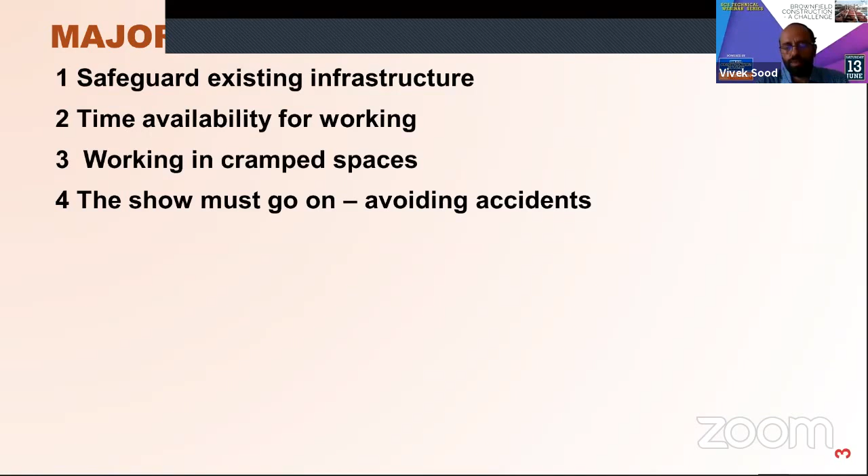Then you have to work in cramped spaces, as we just saw in the metaphoric example, so the space is limited and you have to work within that space. And accidents, if they happen in a greenfield project, they are affecting only the project. But if the accidents happen on a brownfield project, then the existing facility also will not be able to function, so avoiding accidents is even more critical. Accidents are always bad, but to have an accident in a brownfield site is even worse.

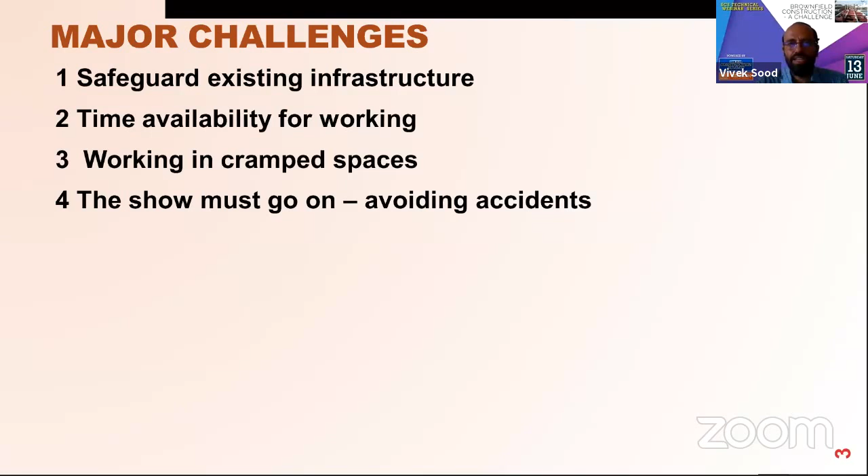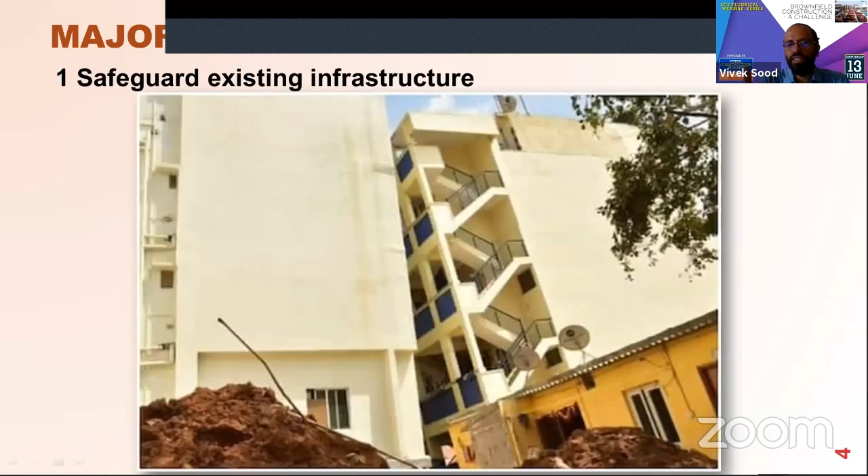I'll take these challenges one by one. So this is the building, and some work was going on next to it, and because of this excavation, the whole building has tilted. You might have seen this in the news, I think it was in Bangalore or somewhere. So this is a challenge: how to safeguard when we plan the work, how we ensure that the existing infrastructure, whatever building structures exist, are not affected.

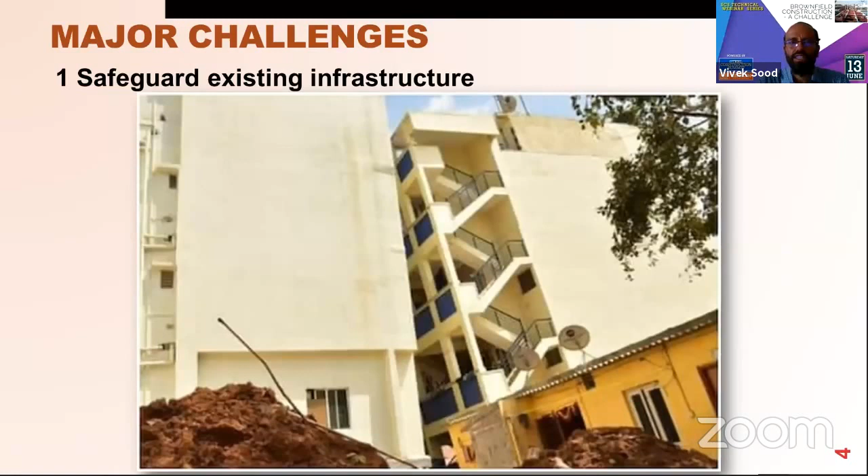When we are talking about the tracks, when it's a brownfield construction and the railway is nearby, you have to leave space for trains to move. Trains are a totally different kind of vehicle compared to road vehicles. We are more tuned to road vehicles, and as we have the habit of crossing the road, we judge how far the vehicle is and when it will stop. That's part of our subconscious, but when we work near railway tracks, how trains behave is totally different. We'll cover this in the next slide.

Then you have to keep away from the electric equipment. Whatever electric wires are there, those are another important item when working near tracks. And the permanent way, this has to be safeguarded. I'll cover these in detail in the subsequent slides.

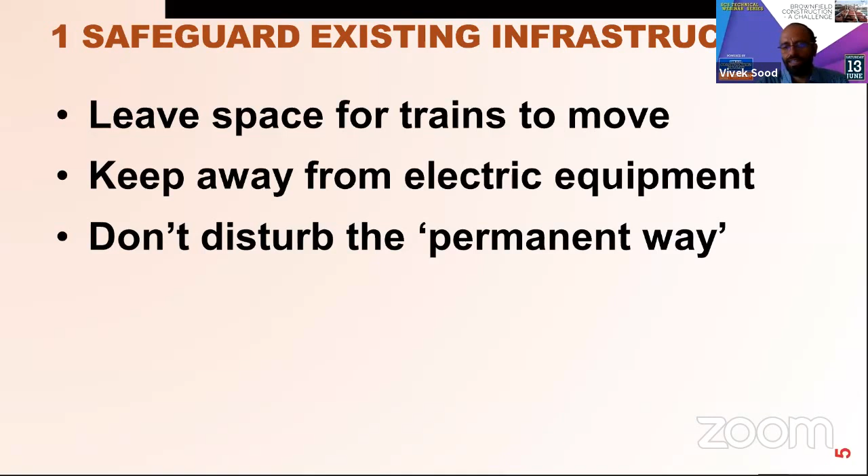This is a very challenging thing, and why it's challenging is, look at the scale. If you've got this car and that car, the distance between them, even moving at full speed, maybe 30-40 meters is good enough. Whereas if you have a train and an obstruction somewhere, the distance required is something like 800 meters, 1000 meters, even more. If it's a loaded goods train, it will take even more time.

It is not possible for the driver to see an obstruction and immediately stop. It takes a very long distance first for the driver to notice that something is wrong, and if he applies even the emergency brake, it's still 500-600 meters bare minimum for the lightest train; for heavier trains it will be even more. So if stopping the train is not possible, the only feasible option is to keep that area free at all times.

If we have to work in an area where trains are to move, then we have to take a shutdown or a block so that the train does not come while we are working in that area.

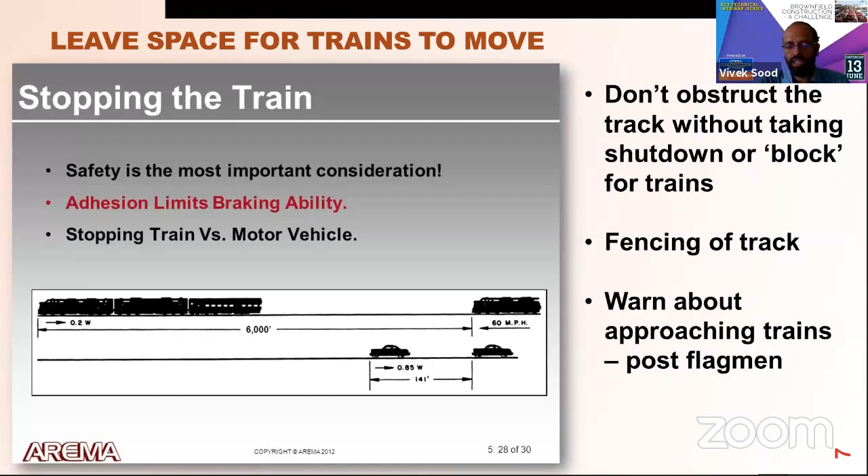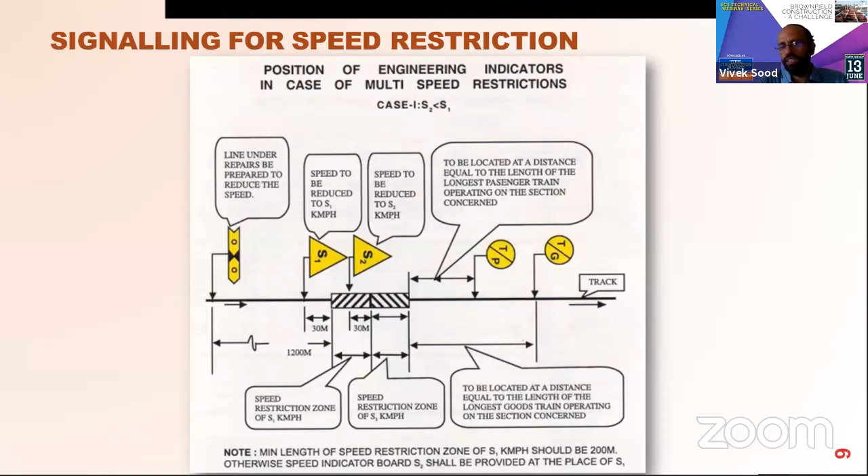It is given in writing to the driver that this kind of signal is going to come, and they may have to slow down or stop the train. So these safeguards are also sometimes taken if you are working and there is a requirement to slow the trains.

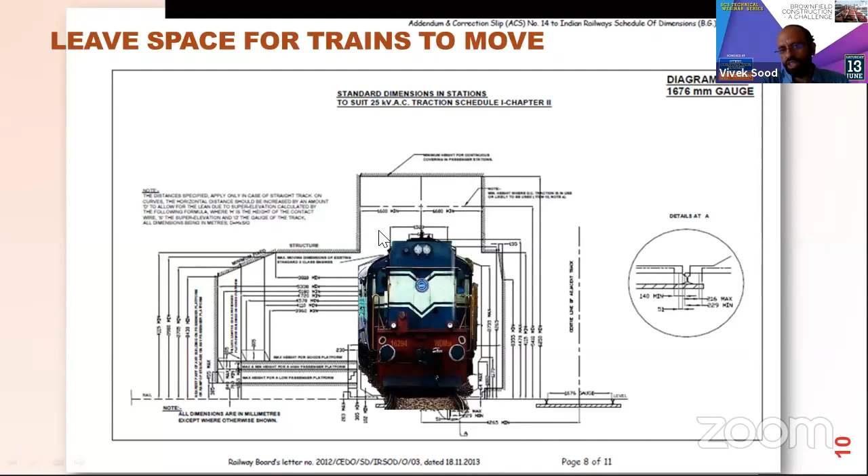This is how a typical train moves on the track. So the space that is earmarked for the trains is something like this. This is the engine, and you see the dimensions of the engine. Beyond the dimensions of the engine, this area is there, which is the blue area meant for the trains. This is called the maximum moving dimension, and then with some more margin, anything that you are doing should be beyond this hashed line.

All this hashed line is to leave the space for other appurtenances, and there will be overhead electric equipment here. This is a platform, so if the platform is there, then you need to leave more space. If there is no platform, this is the space.

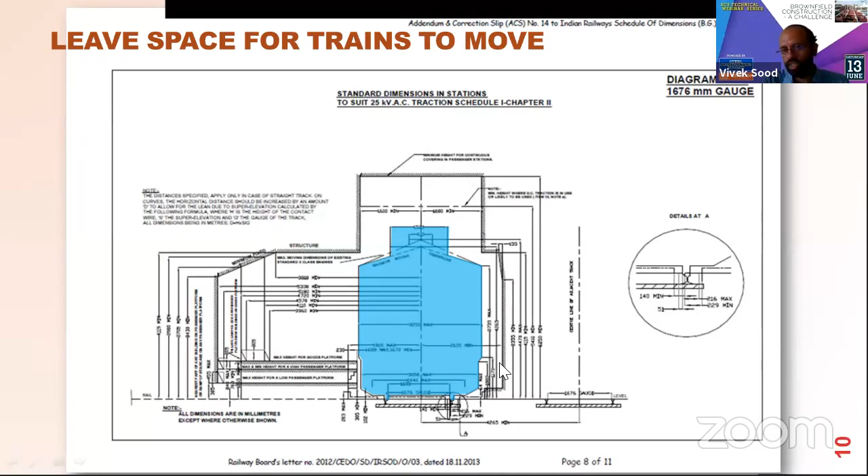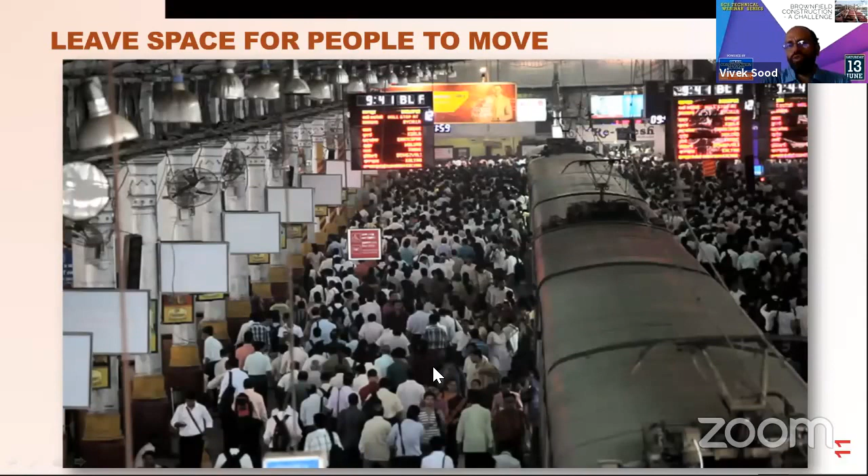So for people who are getting down from the train, you cannot have these columns right next to the train. You can see this area is meant for the people on the platforms. On the other side, nothing is required.

This sort of diagram is given in a book called Indian Railway Schedule of Dimensions, and similar schedules of dimensions are issued for metros, for DFC, and high speeds. All the different kinds of railway systems will have their own schedules of dimensions. These schedules of dimensions are to be respected at all times, or you have to take a safeguard to save the trains from accidents, and there should be no obstruction to the train.

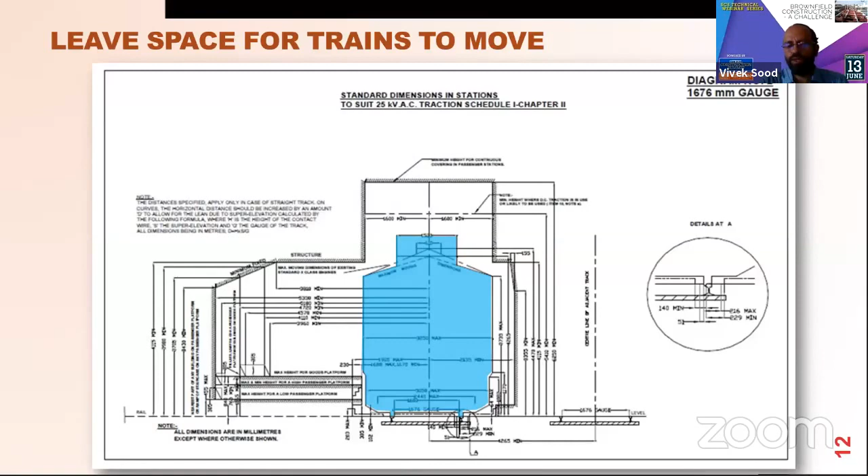Overhead electric equipment is a very dangerous thing if you go too near to a live conductor. So we have to be very careful. You can see that these kinds of works are sometimes required.

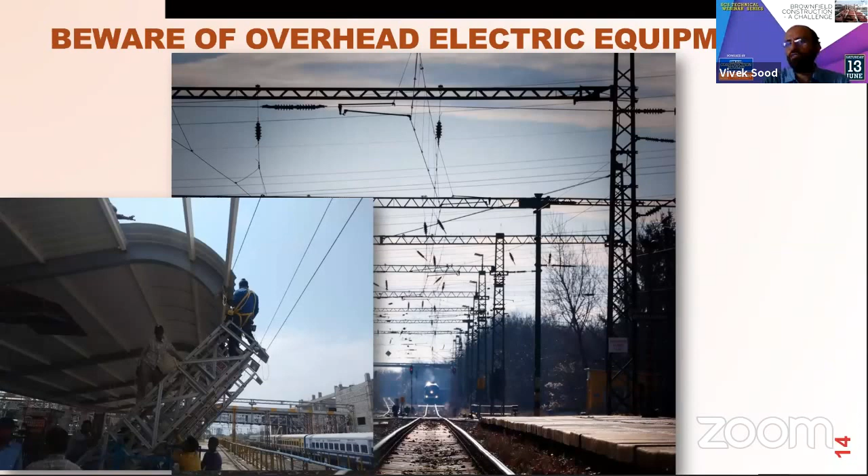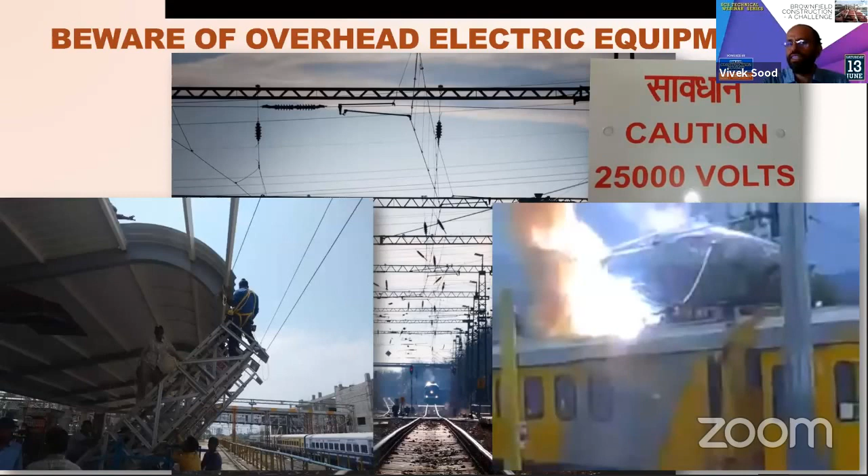These are the overhead wires, and these fellows are fixing the cover on platforms, sheeting. So this work has to be done carefully, because there is 25,000 volts of electric current, and the differential with the earth is too high, which can lead to fires, and the consequences are disastrous for the people and for the equipment which comes in contact with the 25,000 volts.

And from any charged conductor, the minimum safe distance is 2 meters. So you have to keep 2 meters away from any equipment, any conductor, so that there is no accident because of the electric current.

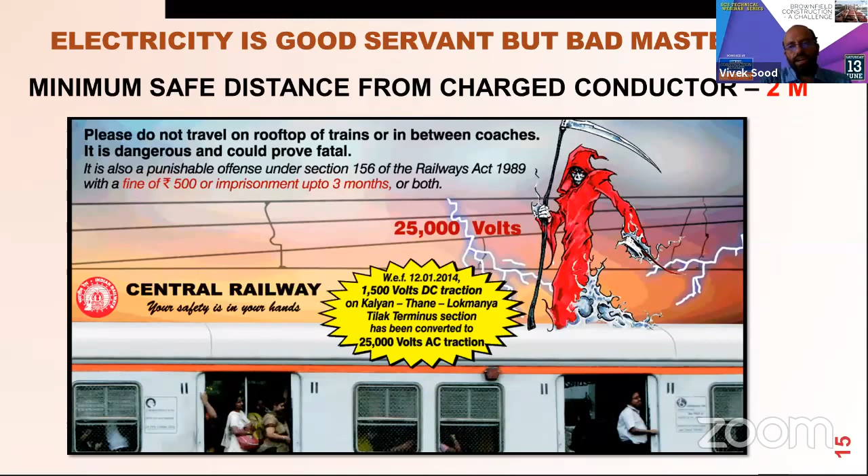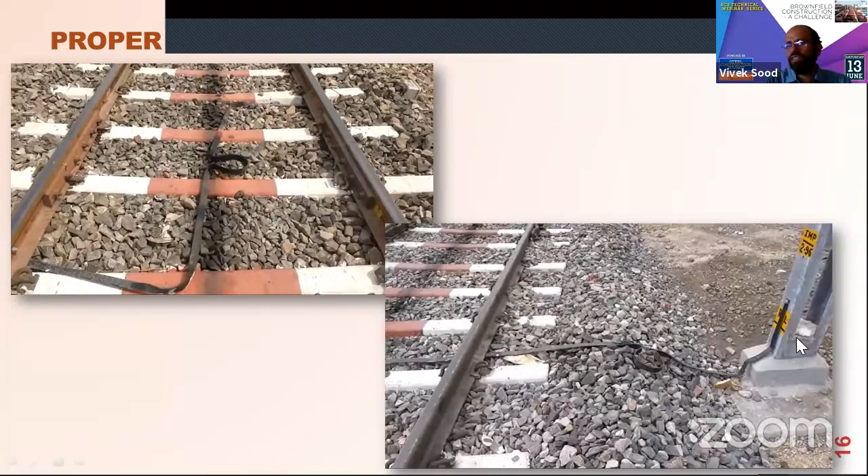And all our arrangements are properly earthed. You can see this is one kind of bond, and this is another kind of bond. So a complete track is earthed to avoid the situation of a short circuit between the OHE and the ground. This has to be taken care of even when you are doing work next to the track. So let us say this is a rail, and another rail, because once the length of the conductor becomes more, the induction also is more.

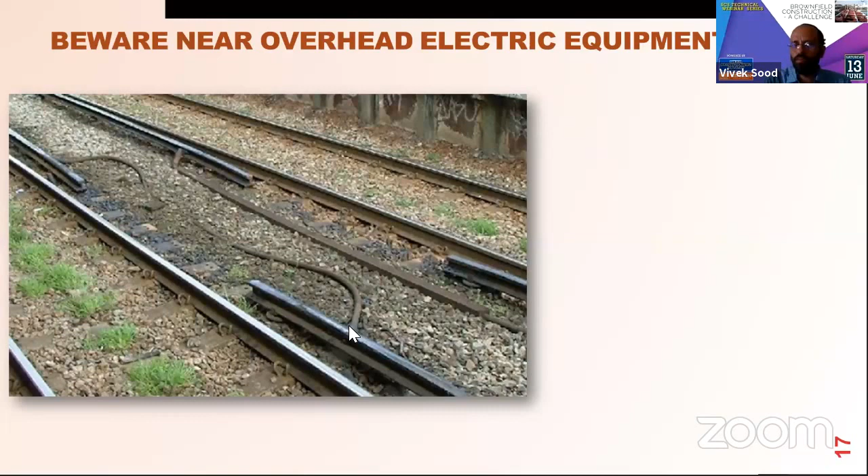So this continuity has been provided, and along with this continuity, some sort of earthing has to be provided, so that the induced current also doesn't go on the higher side, which might lead to minor shocks if not a major accident. But minor shocks can occur because of this, which can lead to its own accidents.

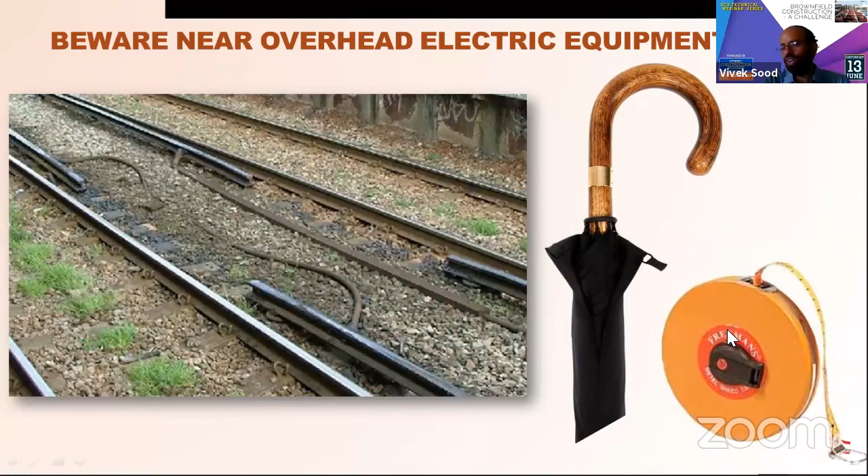Then there are small things. These are the wooden handled umbrellas that we used to use so that the induction doesn't come into our hand when we are working near the tracks. The tape that we are using should be insulated so that by chance, if the rail is not properly earthed, then the charge should not come into our hands.

So small precautions which are there near overhead equipment - any conductor is to be taken as live unless proven otherwise. It has to be assured that the conductor is dead or properly earthed before we get anywhere near it or start working on it. So these are elementary precautions and some special precautions for the railway area that we have to take.

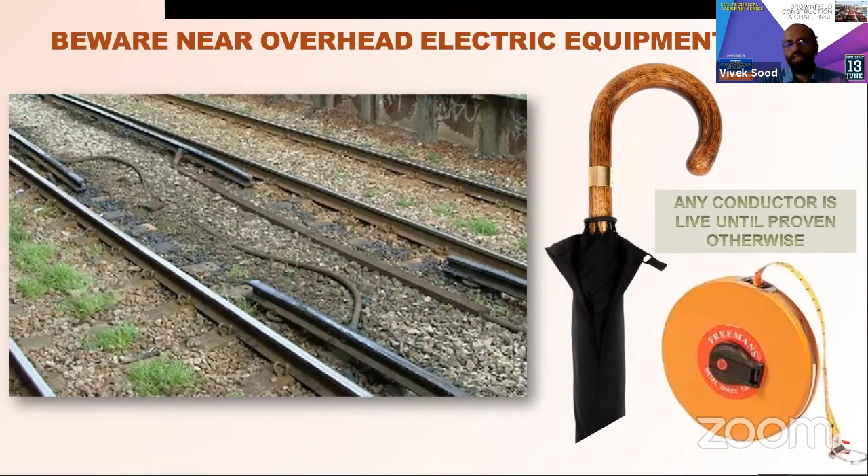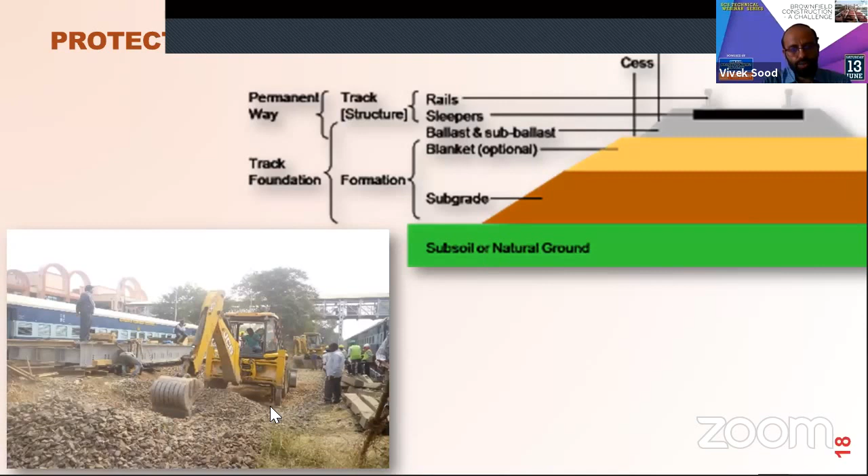Now the track - this is called the permanent way. So we have got the rails here, sleepers, ballast, then blanketing, and then subgrade, and then the natural ground. When we are doing any work, let's say excavation is going on, we have to be very careful because the trains put their load on this whole arrangement. And if we just disturb this portion, then we will have some sort of slips, which might create unsafe conditions for the trains, which is not a good idea.

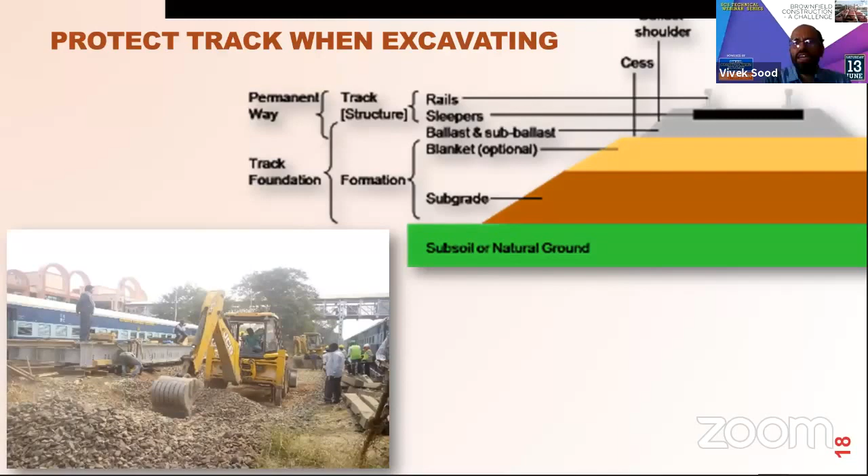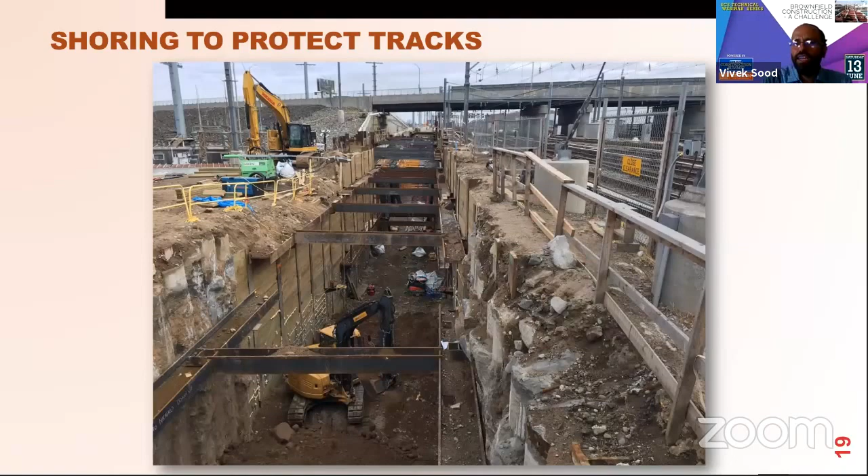We need to be very careful with this and provide shoring or protective equipment to save the slopes so that the trains can move safely. And be very careful when water comes in. Everybody understands that when water comes in, the bearing capacity of soil goes down drastically. So in the monsoon, or wherever we anticipate underground water or any surface water to come in, we have to be very careful in those circumstances and leave extra margins of safety or extra precautions.

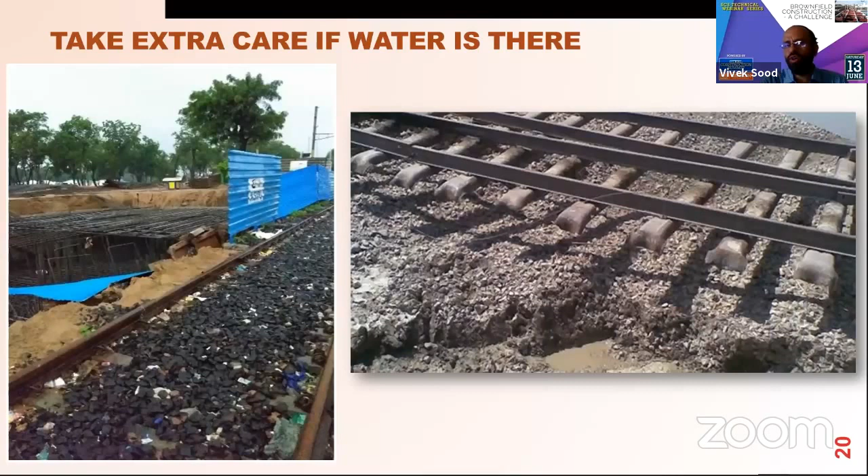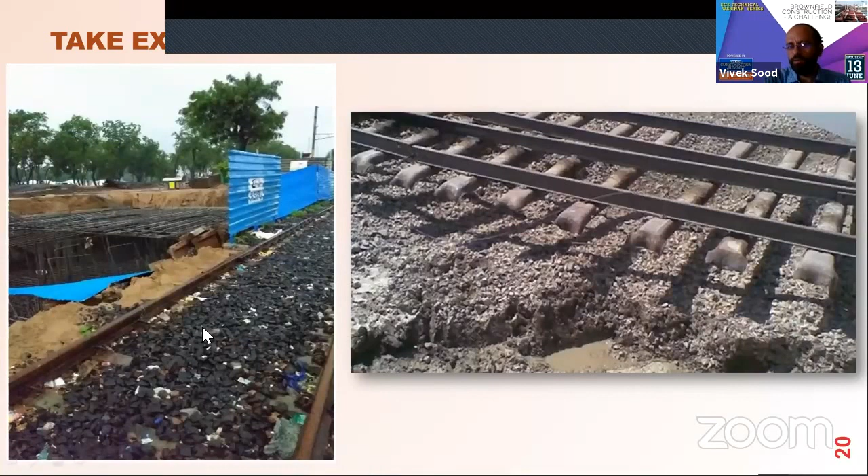So this is actually my own site - we had minor problems because of unscheduled rains. So these things happen, and we have to take extra precautions when water is there.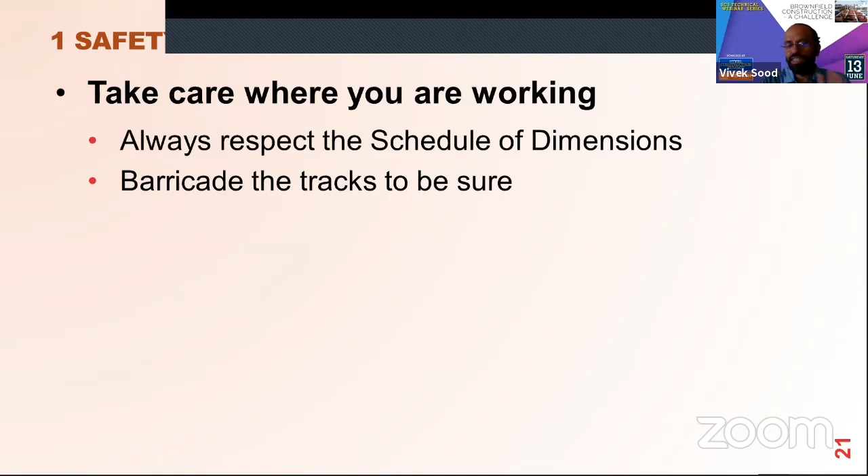So to summarize once again, because of safety, you cannot be too sure. Just to remind, whenever we are working, respect the schedule of dimension, respect the space where the trains are moving, and barricade the tracks to be extra sure. Take suitable traffic shutdowns if required. Earthing and insulation you have to take care of.

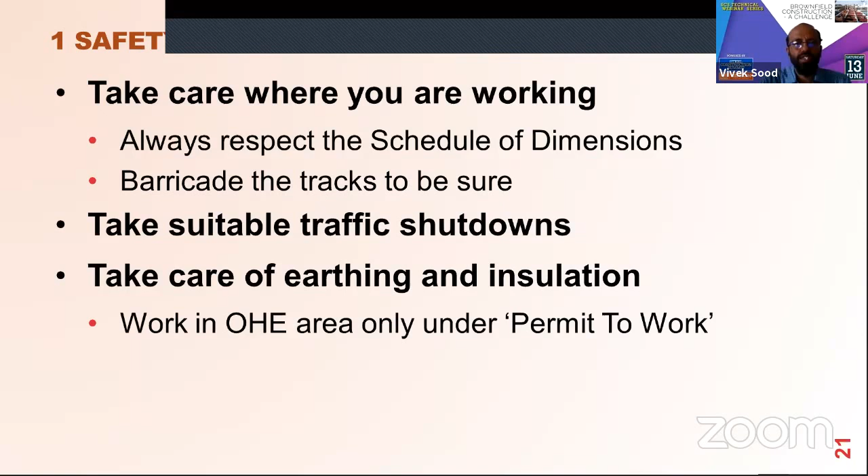If you want to work in the overhead electric area, you take what is called a permit to work. So take proper approvals, earth the electric equipment before you start the work. And when you excavate, take care that the track is properly supported. When water comes, you have to be extra cautious. So this is just a summary of that.

The second major challenge when we work in brownfield construction in railways is that time is always a constraint, because the tracks are busy, and in this busy time, if you want to do anything which affects train movement, then you have to stop the trains. If you stop the trains, then the time naturally will be limited, because that much time is not free. Free time is not available.

So typically the working time which will be allowed is up to 3 hours - that's easy. You can go 6 hours, 10 hours, but then it becomes more and more difficult to arrange. And if you want multiple tracks - let's say there are 2 tracks and you want to shut down both, now no train can move - that will be even more difficult. If you have got 4 tracks and you want to shut down all 4, it's even more difficult. So the working time and the space for working is limited, and we have to work within these limitations.

So what that does is work is to be planned in such a manner that it is manageable in that 2 or 3 or 5 hours, whatever we have got. And we don't have the luxury of using any scheme that we want. And this is most important - immediately after those 3 hours or 5 hours or 10 hours, whatever we have got, the track has to be fit and the traffic should move safely at the end of that.

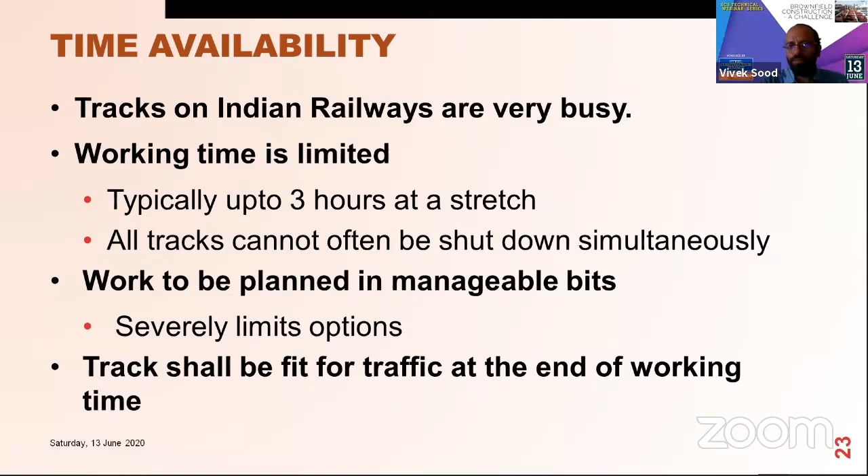Now, this is the most important item, because you can do the work and leave the site and come again next day. But that luxury is not available, because you have to leave the whole site well prepared for the trains to come immediately after the block is over. So this is the major challenge which dictates most of the schemes that we make.

So we need innovation, and what we need is a simple and easy scheme, so that mistakes are not there, so that you don't overrun the time, you don't have the other complications which happen if you don't make simple and easy schemes. Use more and more pre-assembled units, so that the complete assembly goes and gets erected in one go, and there is no need to do extended blocks.

And you have to take extra precautions. There should be a plan B, there should be a plan C, in addition to a very robust plan A. So this is again a very important care to be taken. People have to be skilled, people have to be experienced, working near the trains, working with the time limitations.

That discipline has to be there in the people. And this cool working is linked to the first item. It has to be a simple and easy scheme so that it does not have too much complications. The people who are working have to be cool, because the less time that you have got will build the pressure. Because in these 3 hours, maybe the first 2 hours you can be a bit okay, thinking there is still time. But the last hour will be that now you have to wrap up, and there are maybe 100 activities going on simultaneously.

So in this pressure, when the person who is looking after the scheme starts creating this hurry-up pressure, this can create mistakes which can lead to either an accident, or it can create such a situation that now you're not able to close the site and hand over for the train operation.

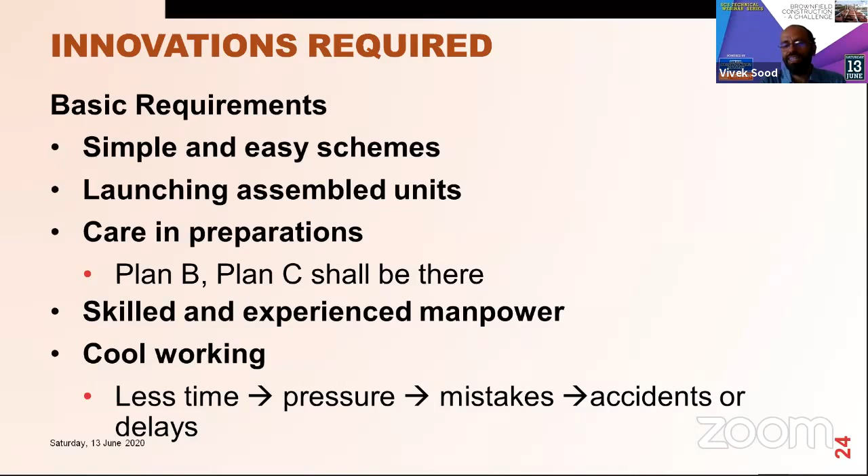As few things as possible — if there are few things, then the person can look at that and be confident that okay, I'm doing fine, and there is no need to panic. So this is the basic requirement when we are working near the railway track in brownfield construction. So this is what is required.

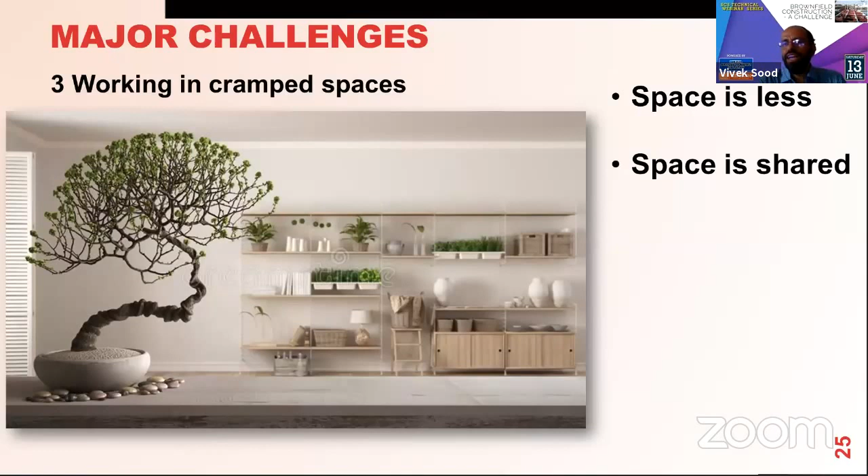And the passing trains are to be kept in mind, even if it is next to your site, even if you are not really above the track, below the track, or just exactly by the side of the track. Even if you are 5 meters away or 10 meters away, still you have to take care that nothing should come onto the track. So the space crunch is also creating its own complications.

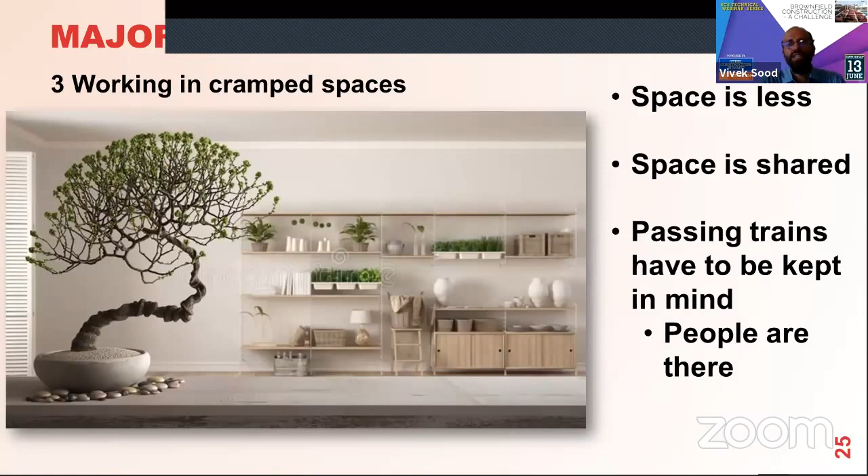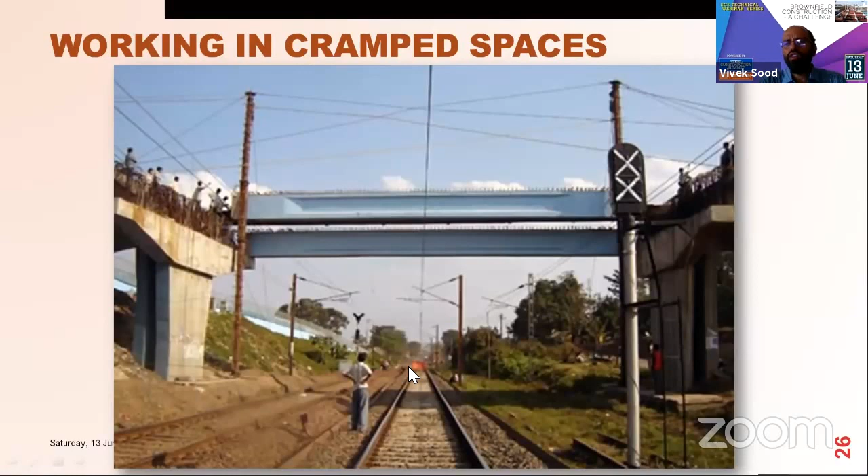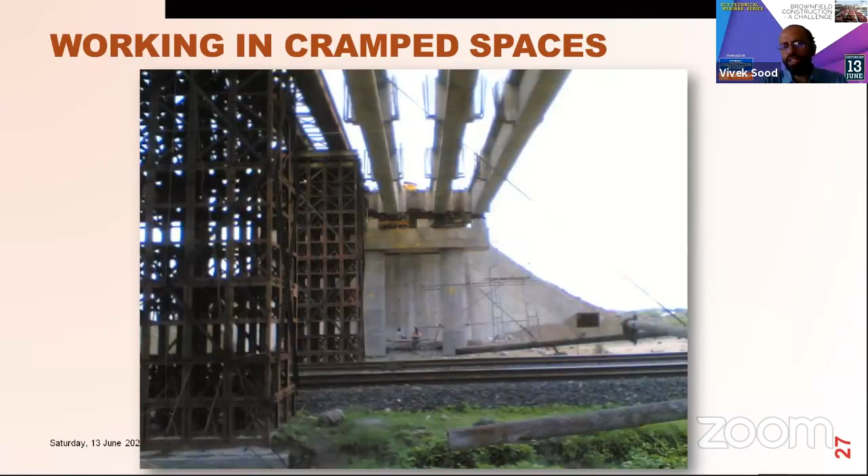So a lot of limitations are posed by the site. So you have to work in this space, and you can see that all this arrangement creates so many complications when you are working in this kind of spaces. So this creates its own challenges, which we have to keep in mind when we design the scheme.

So one important item is that whatever loads you are putting on the ground outside the track can also affect the tracks. So proper foundation and proper calculations have to be done, so that the load from the temporary arrangement, from our girders, from our arrangement that we have put outside the track does not affect the track.

Another very important thing is these utilities: electric lines, sewer lines, signal lines, telecom. In fact, signals and telecom cables are the most important. Electric and sewer lines are found everywhere, but if you cut the signal line, then the trains cannot run. So the whole complete railway system runs on these signals and the telecommunication, the people talking to each other. The whole system works on this.

If you cut the utility, then maybe for the next 10 hours the trains are not able to move properly. So there are those kind of repercussions, very severe repercussions, especially with the signaling cables and also the telecom cables. So these are very important. And of course, electric cables are important for the safety of people who are working. So even if you are away from the track, you still have to take a lot of care.

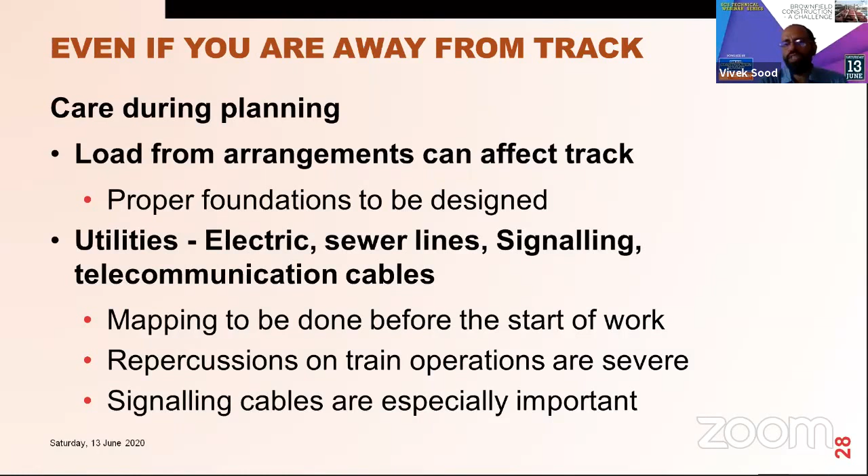And this is the actual site. This is Habibganj, in fact. Before starting the work, we excavated, and the developer, by mistake, cut one cable. Then by mistake he cut another cable. That second one was really unfortunate, because it was the 40 mm bore being made for the geotech investigation, and by chance it punctured one of the signaling cables.

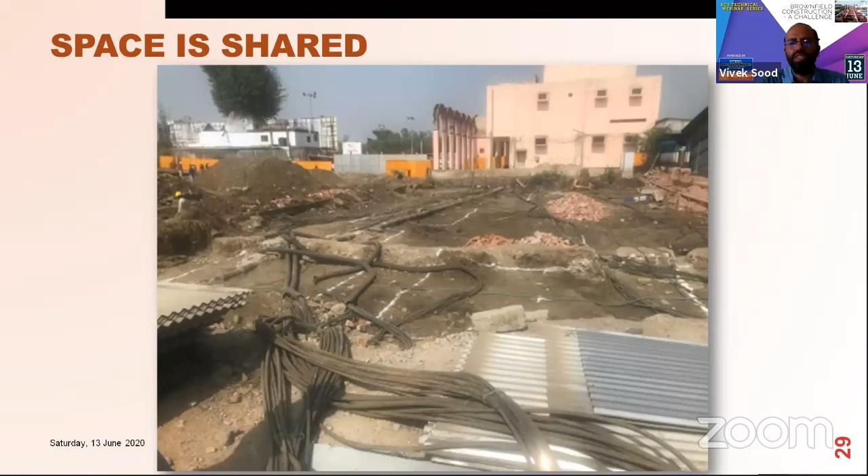Thereafter it was decided that we have to first see how many cables are there. The entire space was dug up for 1 meter, and we found something like 200 to 250 cables at different locations. Once that was exposed, all the cables were shifted, and thereafter, in the last 2 years, there has been no cable cut, no need for anything affecting the railway operations.

Another important element: you may in theory design something, but when the trains are moving, vibrations are coming from the trains. So if the elements are not secured properly, these can be dislodged. You may have calculated that your arrangement is all away from the track, but it can move towards the track due to the vibrations.

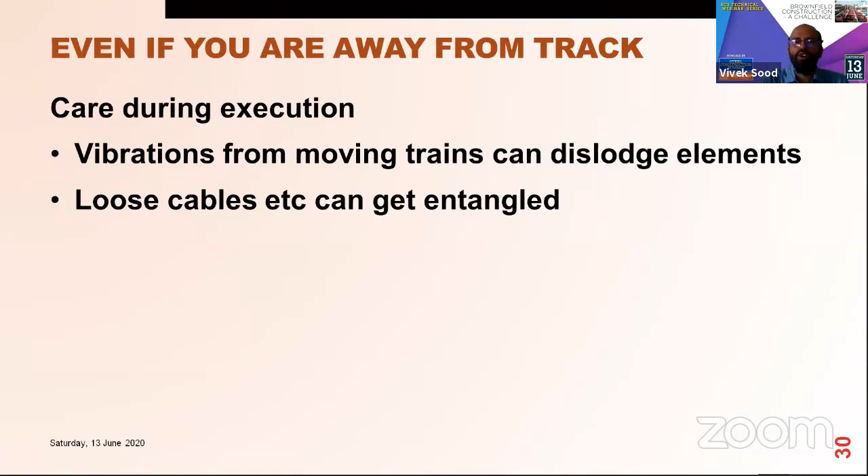Loose cables can get entangled. If something is dangling and the train comes and gets entangled, the whole arrangement can fall onto the track. Debris can fall on the trains. Anybody working, and some bar, crowbar, or reinforcement bar can actually fall onto the trains. So you have to provide safety nets and precautions so these things don't happen.

And of course, lookout that we have already seen. So for the safety of the personnel and the job, always keep a lookout on the trains. So even if the work is stopped, let us say at night, you should still have a person at night looking to see if the passing trains have affected the arrangement that we have provided.

So even if you are away from the track, you still have to take care that it's not the end of the world just because you're beyond 5 meters or 7 meters. It doesn't mean you are safe. Maybe at 20 meters you are totally safe, and within 5 meters you are actually on the track. So between 5 and 20 meters, you still have to take care of these kinds of things.

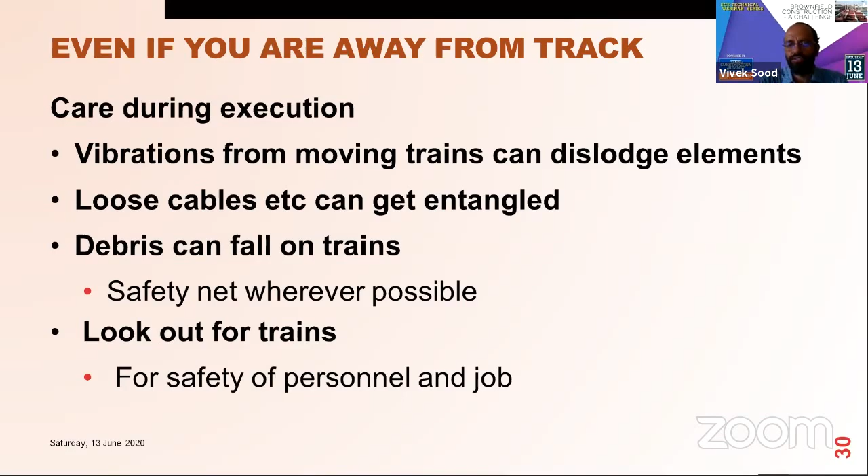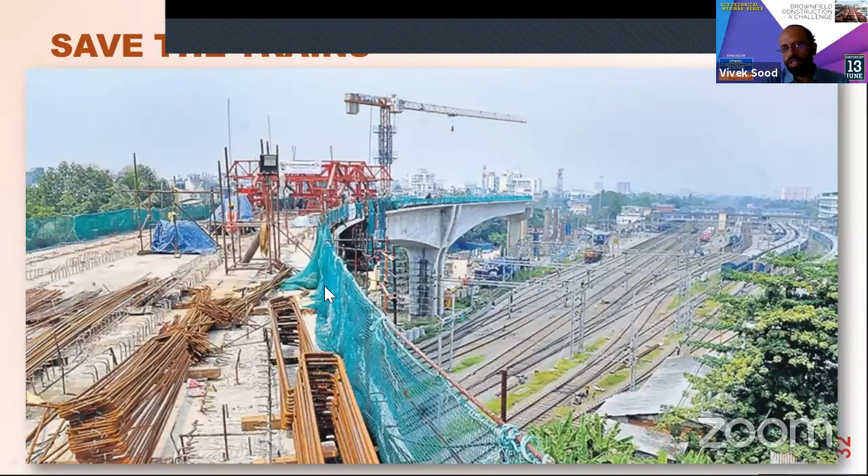Work is going on, and you can see the safety net which has been provided, so you have to safeguard the trains. Similarly, another bridge is being constructed, and the safeguards have been taken so that nothing should fall onto the tracks.

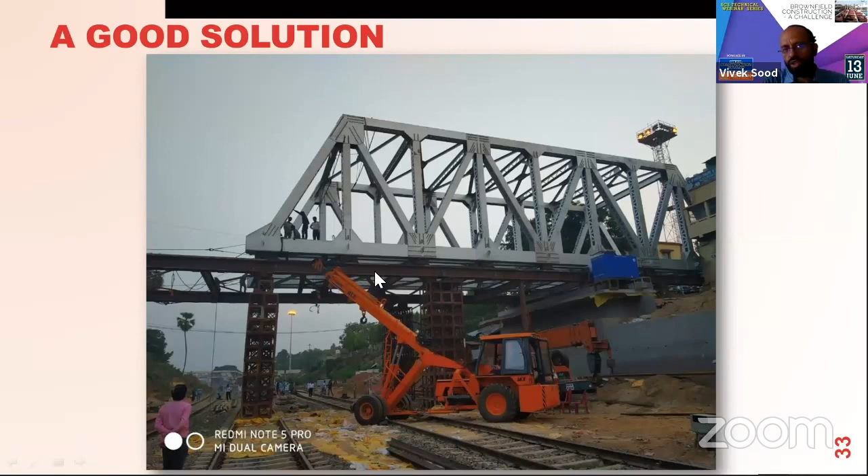What are the solutions? So I come to the business end of this. Exactly now, what is to be done? You see that this girder is being launched, and there is a launching arrangement here. These are called cribs. The crib support has been provided, and this girder is being pulled over the railway tracks. In this case, they have obstructed this track.

So it means that the work is going on under traffic block. And there is no electric wire in this case, so no need for electric shutdown, but traffic, yes, the traffic has been shut down. You see another scheme.

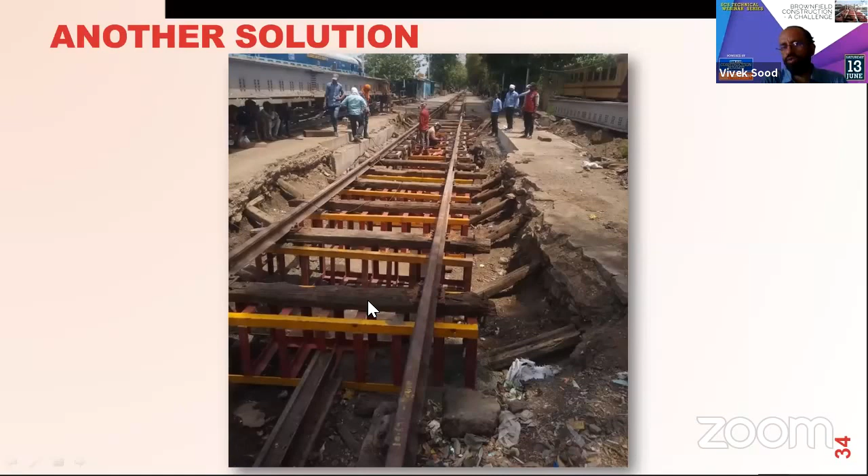You excavate here, and the trains are not affected because of the bridge. This is called a temporary bridge. A temporary bridge has been provided to transfer the load away from the area that we are disturbing. So different kinds of solutions are available when we are working near the tracks.

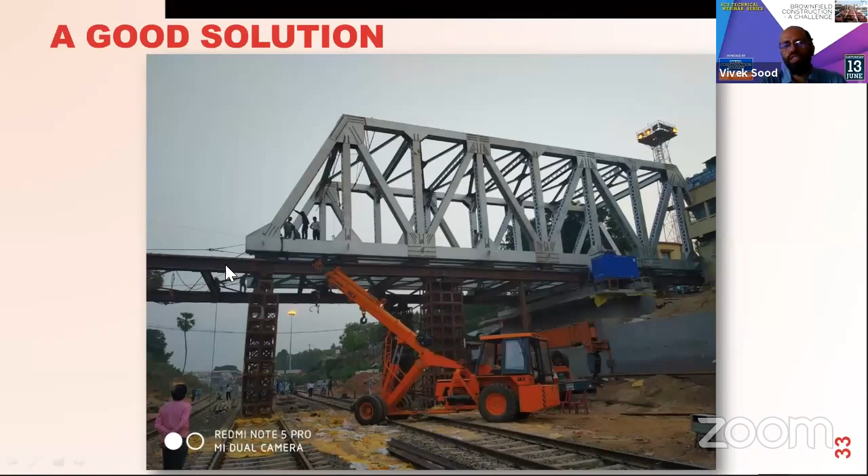If you see the nature of the solutions we have just discussed, all of these are steel. Majority, you can see this once again. Steel being used here, steel being used here, steel being used here, steel being used here. So a lot of steel is required when we are working in brownfield construction near the tracks.

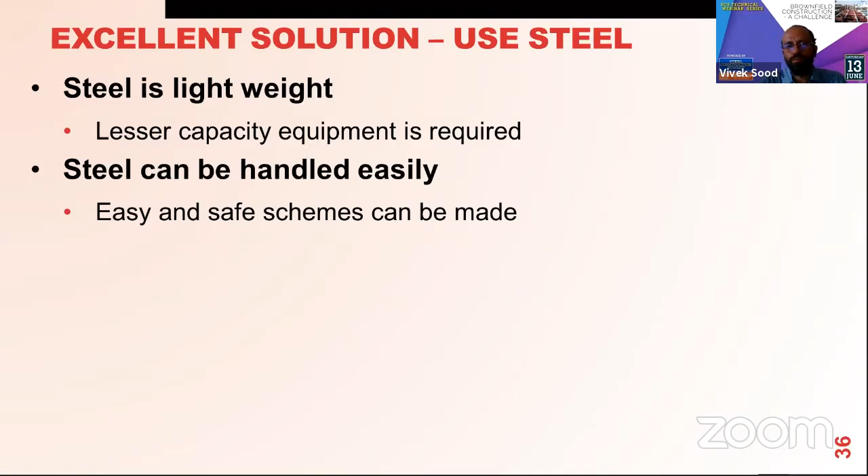Steel is a very good material because it is lightweight, and any people or small equipment can handle it, as compared to concrete, which is heavier for the same loads. Steel can be handled easily because it can take tension as well as compression, so it is much more amenable to being lifted from a variety of places rather than only a few nominated places, as in the case of concrete. So easy and safe schemes can be made because you can work in various different ways.

Field connections are easy. If we are having different pieces, these can be easily assembled and done quickly using bolts. And steel can be reused, so for temporary arrangements, it's great that you can use the same temporary arrangement multiple times.

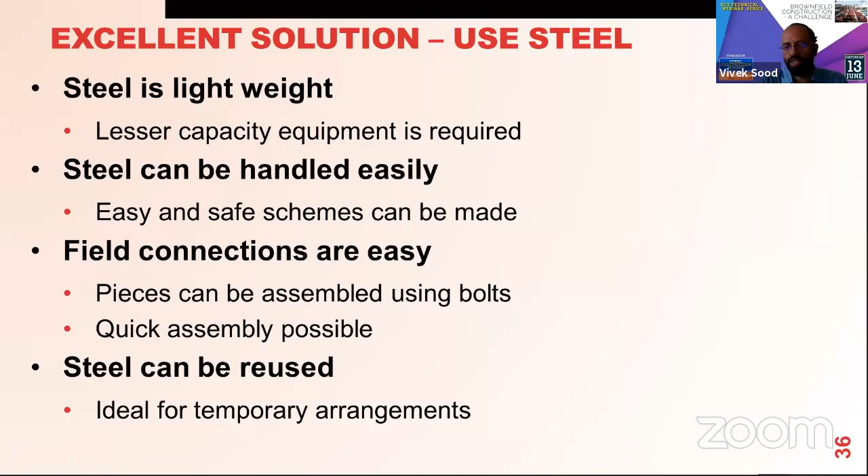Of course, accidents we have to avoid. This is not a part of the scheme, this is something beyond the scheme. Earlier, the safety we were talking about was essentially about the scheme, how you are planning your work. This, of course, is unforeseen. So these also have to be prevented, and we have to be extra cautious when we are near the track.

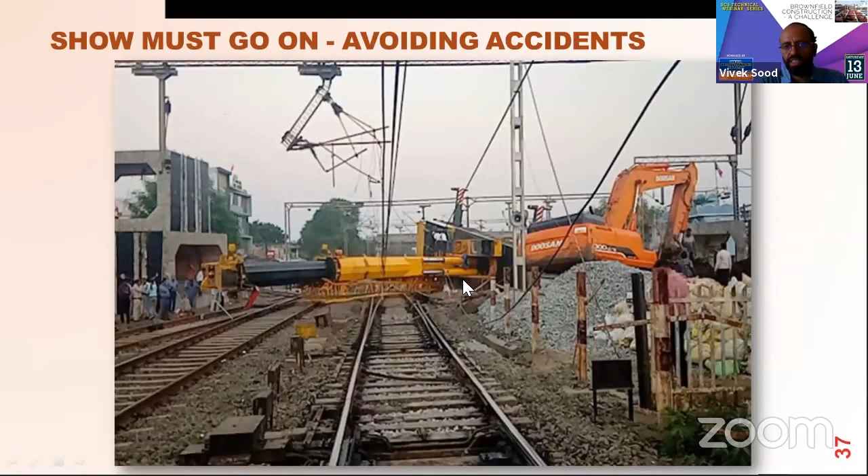You can see that this crane has fallen onto the OHE. The OHE is live, and it can be very dangerous for people who are working here, in addition to being dangerous for the trains and affecting train operations.

In this case, you can see these girders were launched, and one of the girders toppled because of the imbalance, and this girder affected this girder, and the last girder is on the ground. You can see the OHE, the complete OHE has snapped, and this obstructed all these 5, 6, 7 lines which are there. Some major accident.

So we have to be very careful while we are designing our scheme, that it has to be safe, and we have to be ready for these kinds of eventualities while making the schemes.

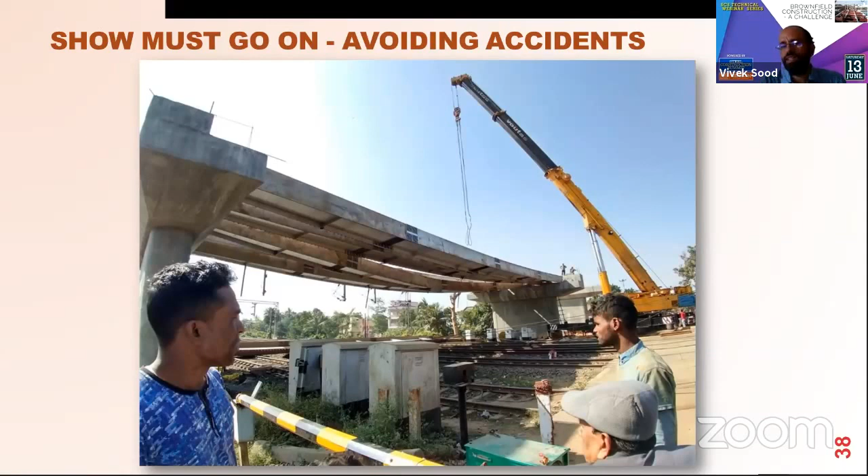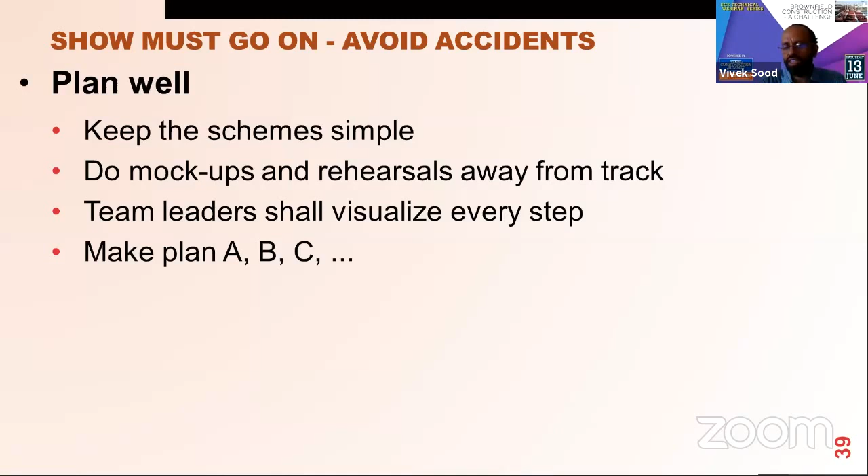Okay, so once again, talking a bit about schemes. Plan well, keep the schemes simple, do mock-ups, do rehearsals, and the team leaders, all the people who have to lead the different teams, have to visualize every step, and they have to make plan A, plan B, plan C, so that even if the situation slightly changes, they know how to tackle that. In fact, plan B and plan C should be visualized so that you can take precautions while making plan A, so that plan B is not required.

Now, design well. This is very important. Temporary arrangements are temporary arrangements, these are assembled at site. So you have to keep a lot of margin of safety, even to provide for some elementary mistakes which happen under time pressure, or maybe the people are not that skilled. So you have to do a well-designed scheme, and it has to be simple.

Then you have to take care that people might not even tighten the bolt completely, and it may not be possible because you have to do the work in 2 hours, 3 hours. So it may not always be possible to check all the bolts by another person. So you have to do a well-designed scheme, tolerant even to small mistakes.

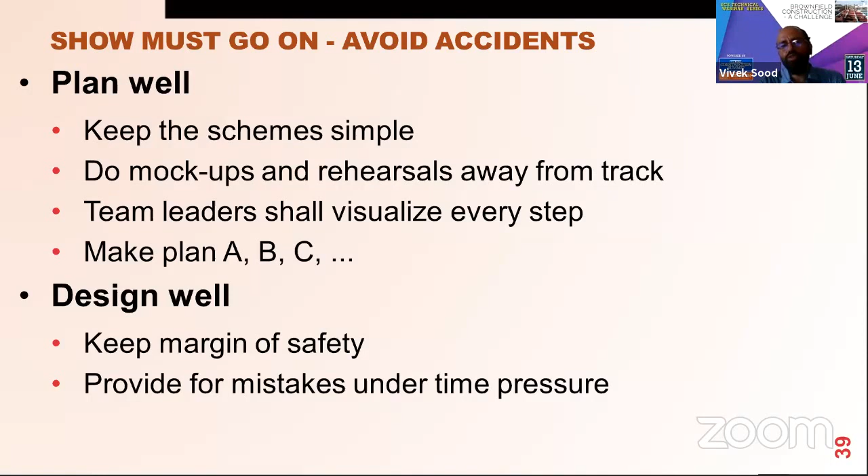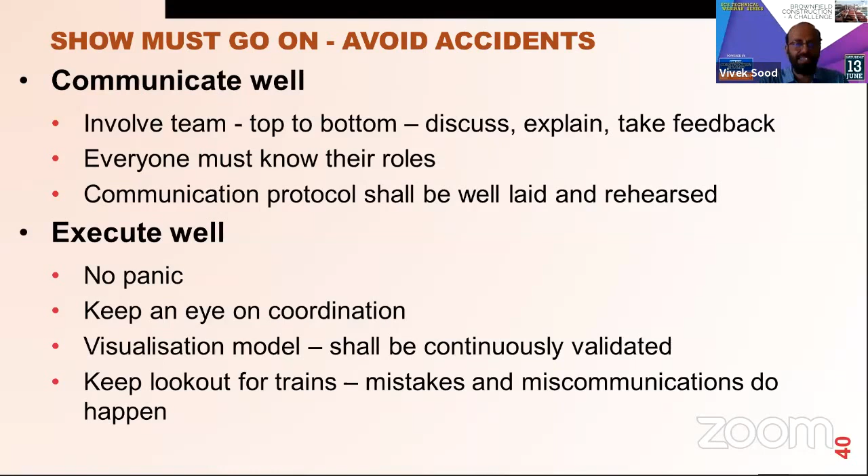And keep a lookout for trains. It cannot be overemphasized - mistakes and miscommunications do happen even with the train dispatchers and station masters. So keep a lookout, even if you have taken a block or a shutdown, or know that the train will not come, it might still come because of some mistakes. So just keep a lookout and keep protecting the track.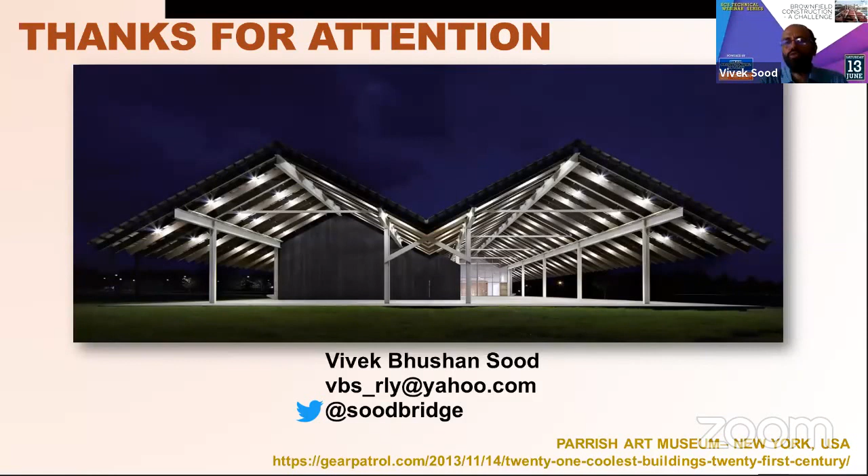So this is where I stop. This is about how the brownfield construction should be planned when we are working near the railway tracks. Do we have questions?

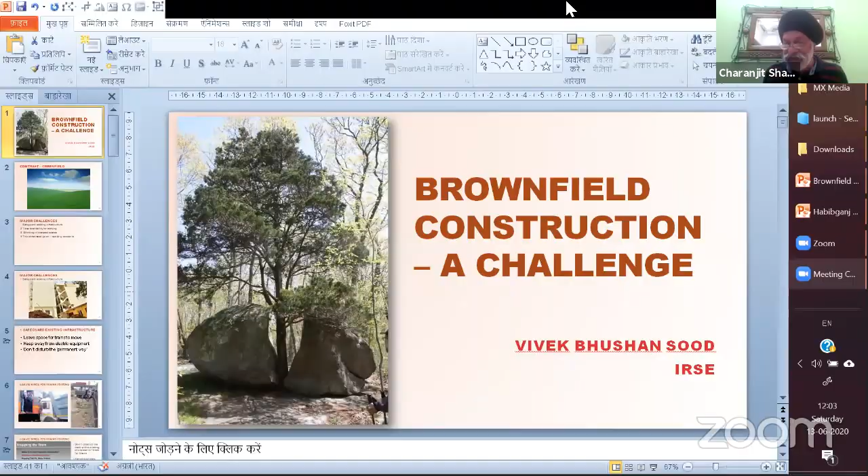Yeah, thank you very much. And indeed it's my privilege. Can you hear me? Yes, sir, it's okay. Thank you indeed. I would say it's my greatest opportunity to be here with all of you together. And my friend Amneet Singh ji, thank you for giving me this opportunity. And Vivek Sood ji, I really adore you and admire you, the type of passion which you have.

Today is the time when things are changing - urbanization growth is there, the city is layering, the infrastructure is being layered. In all the major infrastructure projects, particularly brownfield projects, we find these issues because of safeguarding, time management, space constraints, off-site and on-site challenges. But railways have the maximum government holding, so they fall into a responsible position today - how railways can help, since railway stations are not epicenters but fall into the city itself, and how growth can take place and the cityscape can work. There are insertions in terms of handling large span structures, maybe bridges, tunnels, or railways being remodeled as more than even airports, with large concourses, and steel being a predominantly strong material.